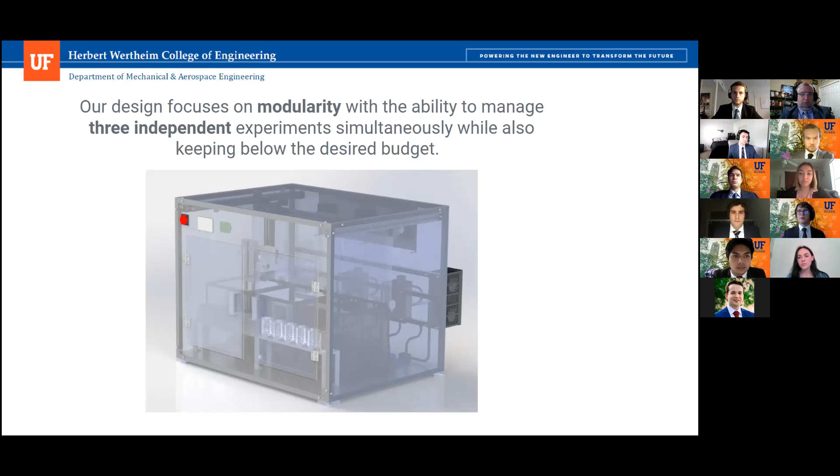Here is an open view of our overall bioreactor. The outside is removed, so you cannot see the doors or the shell. Some important things to note here are on the left side, we have our well plate manipulation apparatus. This holds our liquid and fluid dispensing as well as our FI and OD sensors. On the bottom right, you can see it pointing to our testing chambers. There are 3 of them here that you can see.

Other important details are the elements of our heating and cooling, which we have our heat vent and our heating and cooling water reservoirs in the back, as well as our fume hood adapter to allow our device to work with a BSL-2 biosafety cabinet.

If a user was beginning to start up this device to begin using it, all they would have to do is choose which reactor they were going to use, place their well plate or test tube holder inside, lock it down with the thumb screw, and then also put in their desired filter into our FI sensor and fill up the liquids in the front with the desired cleaning solutions and whatever liquids they desire in the reactor. And then the reactor can begin processing once you activate it on our touch screen on the front.

Here is a close-up of our testing chamber by itself. It has 3 main important elements inside of it. One is our mixing element that covers the 3 orbital patterns: linear, orbital, and double orbital. We have our gas dispensing solenoid at the bottom and our heating and cooling radiators. The only one that can be visible at this time is the cooling radiator on the right side.

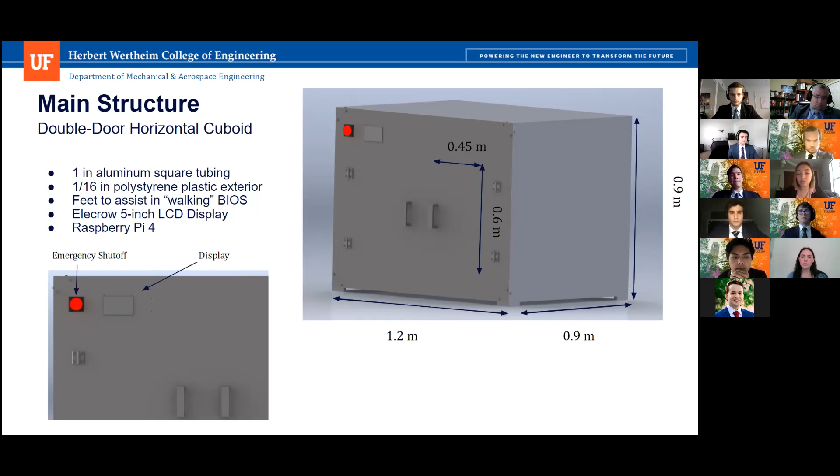Right, so the second element is the mixing element. It consists of a slider crank, orbital shaker, and holder. The slider crank attributes to linear motion, and the orbital shaker attributes to rotational motion. There is a NEMA 17 motor for both the slider crank and orbital shaker, each reaching 500 RPM at a high load on the mechanism.

At the very bottom of the mechanism is the slider crank. The slider crank moves a guide rail carriage on which the orbital shaker is attached. The orbital shaker has 4 offset orbital shafts for stability of the holder that rotates above it. The holder has a slit where the well plate and conical tube slide into, and a thumb screw that is used to clamp them into the holder. Below the holder is an LED array for the OD sensor that will be discussed later.

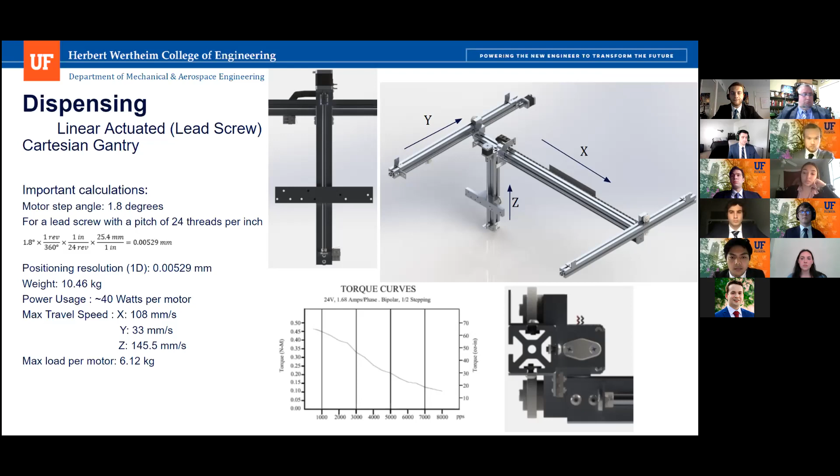The bending moment induced on the beam by the weight of the Z-axis guide rail is maximum when it is placed at the center of the beam. The bending moment was then used to find the bending stress at this location, which then provided the strain in the beam using Young's modulus of the beam's material.

Next subassembly is the gas dispensing system. For this, we're going to be using a series of solenoids. They're 1/4 inch in diameter.

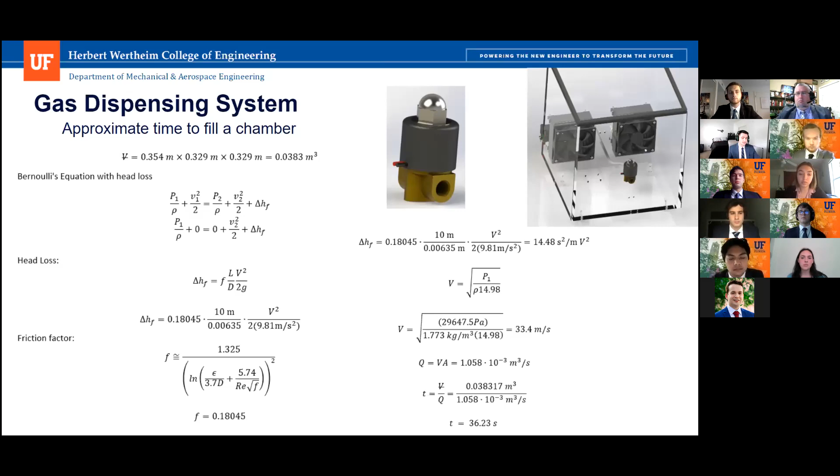Here is a quick calculation for the flow through into the testing chamber. We assumed a minimum pressure inside the tubes coming from the lab of 4.3 PSI, following through with some head loss, and it came to a fill time of about 36 seconds.

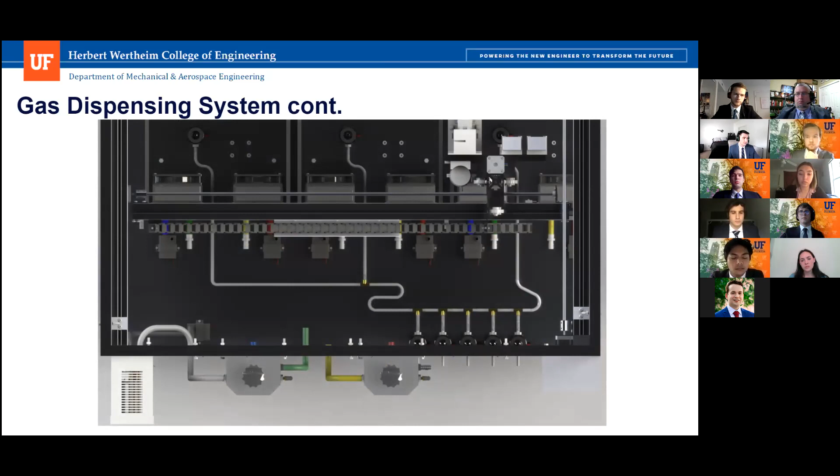Located down at the bottom corner of this image, you can see the inlets that the user will plug the tubing into. Behind this, inside the testing chamber, is the solenoids, which will flow into the testing chamber. This is a top-down view coming from the outside connectors in the bottom corner. It'll flow into each individual chamber to the inlet solenoids on the inside of the individual chambers.

When an experiment is done, the testing chamber roof will open and the fans inside will start to spin, as well as the fans on the main structure. And it'll vent from this hood at the very top of the structure into a bio cabinet.

Our next subsystem is our heating and cooling system, which is responsible for temperature regulation. We have implemented a liquid-based heating and cooling system, which allows us to reach the desired temperature ranges outlined by the customer within the required time.

2 liquid reservoirs are located on the back of BIOS, one for hot fluid and one for cold. For the cold fluid, we are using a combination of 70% water and 30% glycerin. This is to reduce the freezing temperature to around -9 degrees Celsius. Water is used for the hot fluid.

A series of pipes and pumps are used to distribute the fluid to the testing chambers, where radiators are used to circulate air and distribute heat. A 600-watt submersible heating coil has been placed in the hot water reservoir, which is used for heating the water to the desired temperature of 70 degrees.

For cooling, we have designed a unique apparatus consisting of Peltier plates, water cooling blocks, and a CPU cooler to vent off additional heat from the thermoelectric.

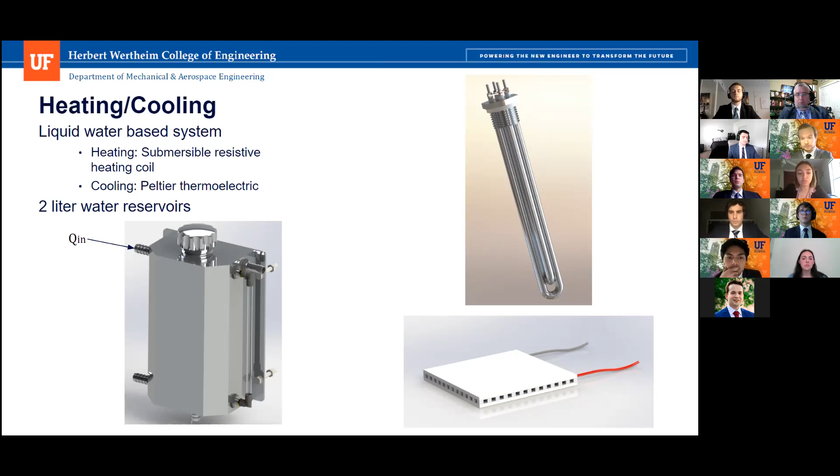Before any experiment can be run using BIOS, customers must prime the temperature regulation system. To prime the system, the reservoirs must be filled with liquid as the pumps are ran at a low power. This will flush liquid throughout the pipes while also filling the reservoirs. Once the system is full of fluid, users will enable the heating and cooling units.

Pictured here, we have calculated the total time needed for the fluids to reach the necessary operating temperatures. For the hot reservoir, this is 70 degrees, and for the cold, this is 4 degrees. At this point, the 2-liter reservoir will be fully filled and the fluid will begin at room temperature.

The heating coil will be operated at the full power of 600 watts for priming, and the maximum power of our cooling unit is about 70 watts. Considering all of these factors, it will take about 16 minutes to heat the hot reservoir and 48 minutes to cool the cold reservoir.

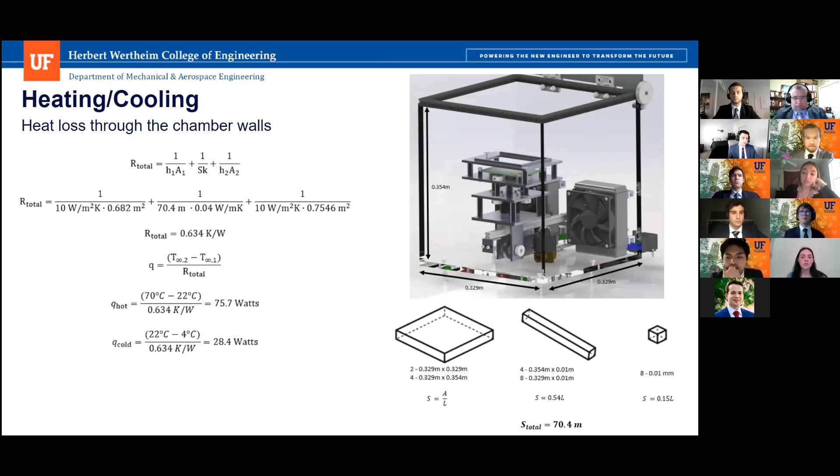In order to determine the power loss through the walls of the testing chamber, we did a 3-dimensional analysis. For this, we had to calculate the shape factors of the walls as well as the edges and the corners. Doing this came out to a heat loss at the maximum temperature of 75.7 watts and at a heat transfer into the chamber in the cold situation of 28.4 watts.

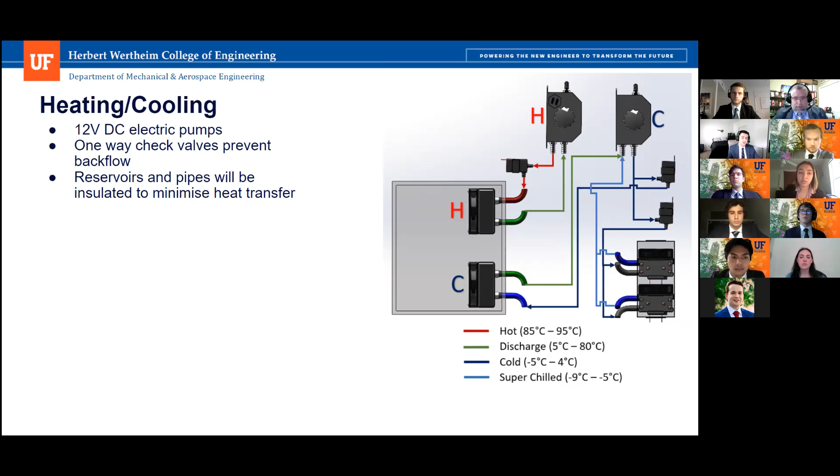However, we don't chill the water inside the reservoir. This will have to be pushed out to a different cooling section of our energy system, through the coolers. We'll cover this briefly later.

In order to handle the high temperature water, we've had to consider using a hot temperature pump as opposed to the ones used for the cold water. The desired temperature of the fluid inside is 90 degrees.

For the cooling, we'll be using thermoelectrics. Pictured on the far right is the cooling stack - this is the entire system of how we cool the water. Starting from the bottom is insulation. Up from that is an aluminum block, which allows water to flow through it to transfer heat. Up from that is the thermoelectric, which pushes the heat into the heat sink at the top, a CPU cooler, which then exchanges the heat with the atmosphere.

Each cooling stack has a cooling power of about 35 watts, and we're trying to get the temperature down to around -4 degrees. To do this and prevent water from freezing, we'll use a 70-30% glycerin-water mixture, which brings the freezing temperature down to -4 or -9.4. The total power of the system that we need to vent through the CPU cooler is 115.5 watts, and the cooler is rated for 120 watts.

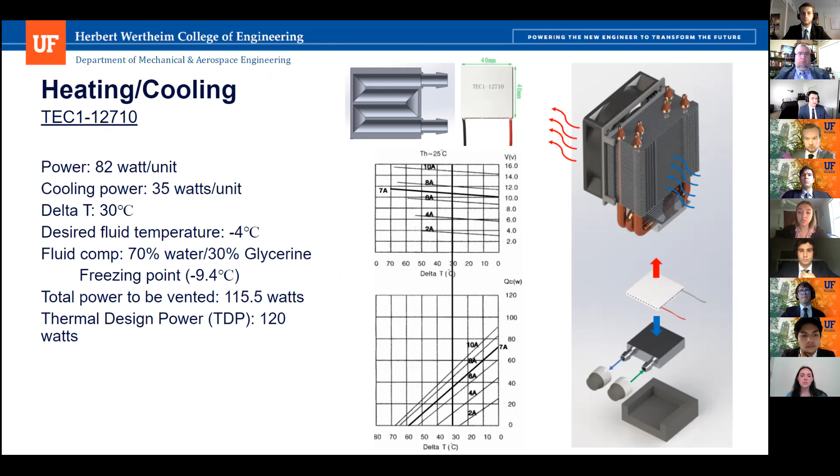An important consideration is the external temperature of BIOS. While the testing chamber will be inside the main structure, the reservoirs will be external. As such, we made sure the temperature of these reservoirs will be safe to touch by heavily insulating them.

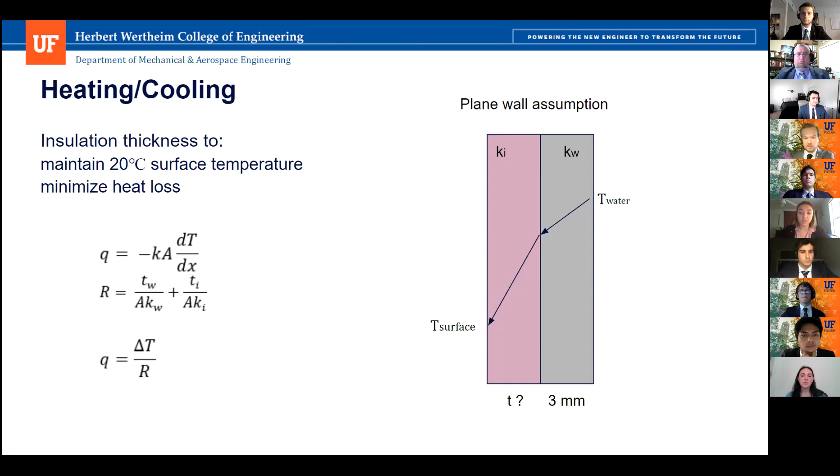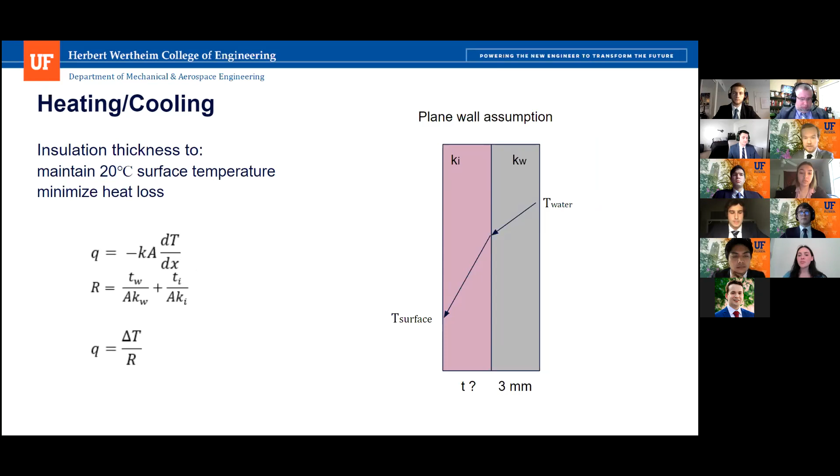A thermal resistance network was set up on the reservoir to determine the necessary insulation thickness while minimizing heat lost through the walls, pictured on the right of this slide. The temperature outside the wall was set to 20 degrees, which will be safe to touch. The temperature at the internal wall was assumed to be the temperature of the liquid inside.

The reservoirs are made of aluminum, which has a thermal conductivity of 205 watts per meter Kelvin. We selected polystyrene as the insulation material, which has a thermal conductivity of 0.04 watts per meter Kelvin. The area used was the largest area on the reservoir, which will have the lowest resistance and therefore the greatest heat lost. All of these values are pictured on the left of this slide.

We performed an iterative process to determine the necessary insulation thickness. After performing multiple trials, the insulation thickness was decided to be 15 millimeters.

Calculations are shown on the right for the heat rate for both reservoirs. Using this 15 millimeter insulation thickness, the heat lost from the hot reservoir is about 1.19 watts, and the rate of heat transfer to the cold reservoir is about 0.4 watts. The heat loss from the hot reservoir is over the desired 1 watt; however, this was deemed acceptable to ensure a nominal dimension for the insulation.

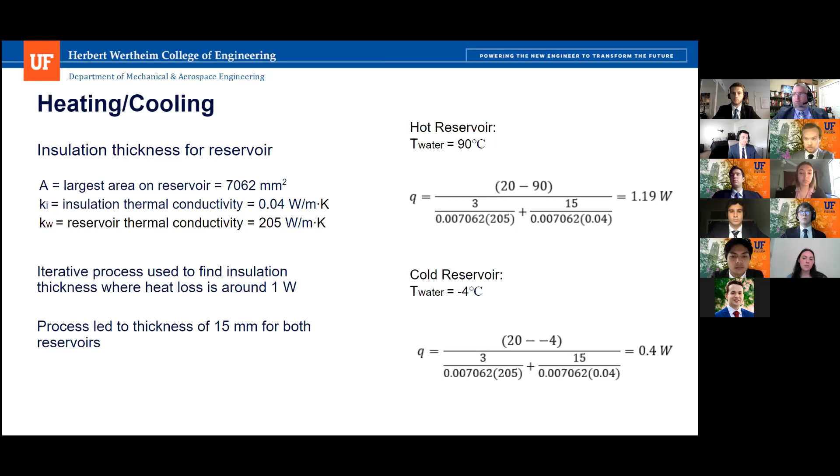For the fluid management system, we are using a linear actuated pipette made by Opentrons - this is the P300 model. Some important calculations for the system include a Reynolds number of 604.7, a flow rate of 300 microliters per second, and accuracy and precision of 0.6% and 0.3% as taken from the website. The achievable volume is 5 microliters to 20,000 microliters, and this takes into account the pipette returning to the reservoir.

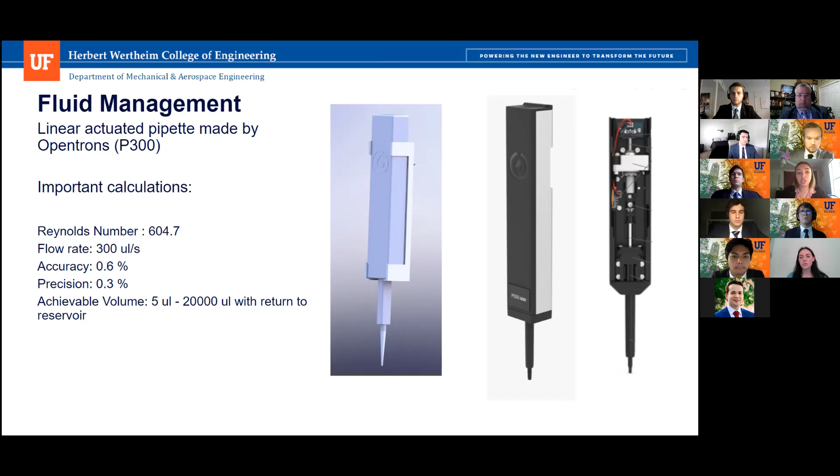For the waste management, we're also using a linear actuated pipette made by Opentrons, however this model is the P1000. A larger pipette was chosen since accuracy and precision aren't as crucial as for the fluid management system. Important calculations include a Reynolds number of 604.7, a removal rate of 1,000 microliters per second, and accuracy and precision taken from the website of 0.7% and 0.15%.

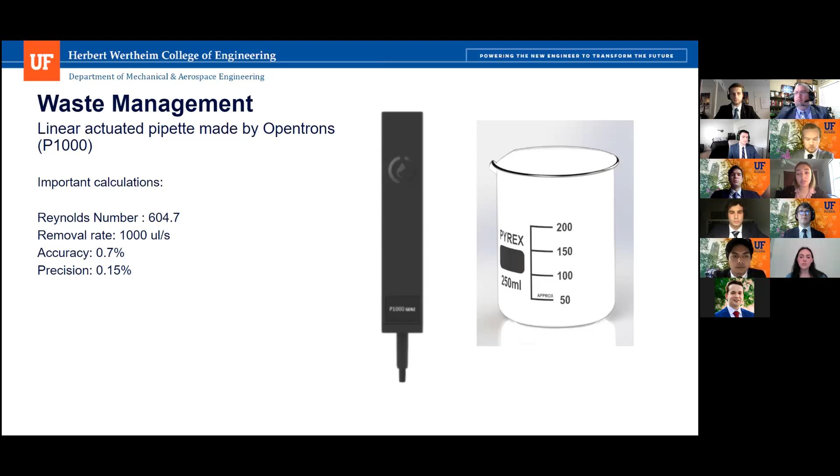The fluid and waste management systems both have auto tip ejection functions, allowing tips to be removed and placed in the waste bin quickly. Also, both the fluid and waste management are attached to the gantry shown in the dispenser element, and a mount made out of ABS is used to attach both of them to the gantry.

BIOS is equipped with a sensor element subsystem responsible for taking spectrometry readings. Our customers require that BIOS be able to take measurements for both fluorescence intensity and optical density. For this, we have implemented 2 assemblies within this subsystem, one for each measurement type.

First, we'll present our fluorescence intensity apparatus. Our fluorescence intensity apparatus consists of 3 main components, all enclosed in ABS 3D printed structures which will then mount to the gantry. The first and most important component is the photomultiplier module, otherwise known as the PMT module, created by Hamamatsu.

PMT modules are highly sensitive pieces of equipment that will convert light into electrical signals. A circuit is built into the PMT module that will output any readings as a current, which can then be wired back to our main controller.

Our PMT module has a spectral range of 300 to 740 nanometers, which can therefore measure all light within the visible range. Additionally, our PMT module has a settling time of 0.2 seconds, which means the FI sensor assembly can take an accurate reading of a well within 0.2 seconds and ensures BIOS can measure fluorescence intensity within the customer desired time of 6.5 minutes.

In fact, the FI sensors of BIOS can process a 384 well plate in 1.58 minutes, as stated earlier.

The next component for the FI assembly is a microscope filter cube from Thorlabs. Emission filters can be inserted into the filter cube, which will filter light to a specific wavelength as desired by the customer. Over 100 fluorophores are compatible with the Thorlabs filter cube set.

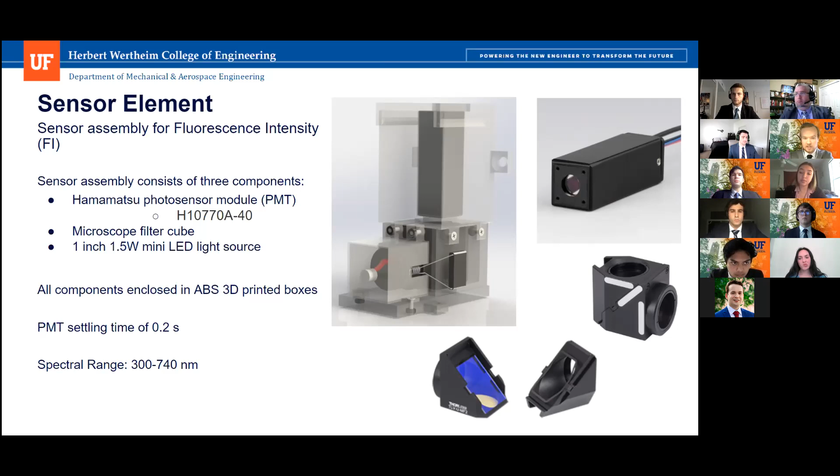The power of the light source output is set by the maximum measurable power of the sensor. Our specific PMT module has a cathode radiant sensitivity of 189 milliamps per watt. This is essentially how much current the PMT can convert per unit watt. Additionally, our PMT can only output 2 microamps of current at maximum.

Considering both of these equipment properties, we deduced that the PMT module can only measure about 0.01 milliwatts, as pictured to the right. Therefore, our light source will be more than powerful, and in fact will need to be throttled down. This is not surprising as PMT modules are a very sensitive piece of equipment, specialized for high sensitivity measurements, meaning they are designed to work with low level light detection scenarios.

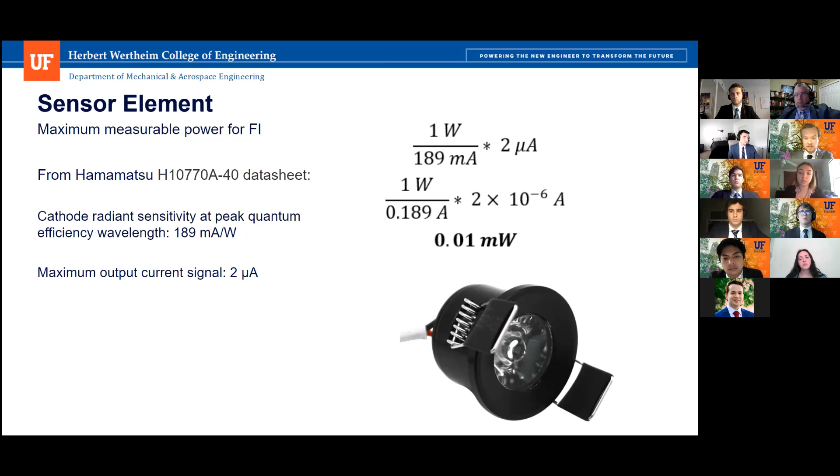As for the optical density sensor, the sensor assembly consists of the following parts. First, a 918D-SL-OD3R photodiode made out of silicon inside an ABS 3D printed structure. The photodetector is compatible with DB15-based Newport that will then be connected to a Raspberry Pi.

The light source consists of an LED source located below the well plate in the mixing element, whereas the OD sensor will be attached to the dispenser. So the light passes to the well plate and is received by the optical density sensor.

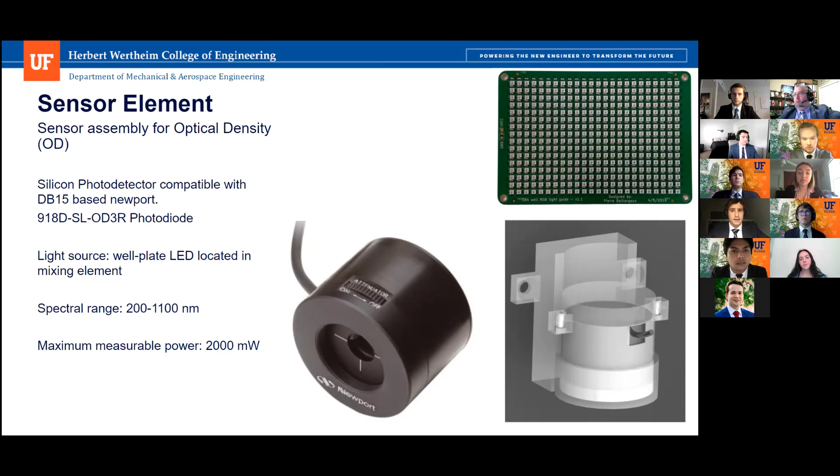The optical density sensor can read 600 nanometers and has a spectral range of 200 to 1100 nanometers, which also measures the desired wavelength. The light source can output 600 nanometers as well. And finally, the maximum measurable power is 2000 milliwatts.

And now, for the power consumption, I would like to mention that the following data is analyzed when the experiment with the 3 testing chambers is taking place at the same time with the 3 motors. So that is the worst case scenario.

So the power usage by the total system, again in the worst case scenario, would be 600 watts for heating and cooling, 120 watts for dispenser moving in 3 axes, and 240 watts for the 3 mixing elements. Adding up the power by every subsystem, we get a total usage of 960 watts, again in the worst case scenario, which is below the 1000 watts maximum output of the power supply.

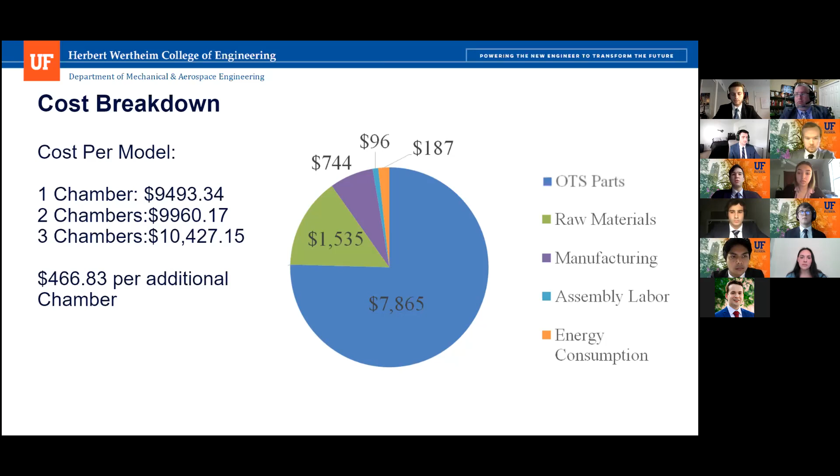Now we're going to explain a little bit of why you should choose BIOS over the competition. Well, our main benefit is our unifying goal, which is our modularity. We can maintain 3 different gas compositions, temperatures, and dispensing fluids, which means we can run 3 individual experiments.

Each subsystem was designed to be separable from each other in the main assembly for easier transportation. It's also very efficient at heating and cooling, and all processes are entirely automated. All that is required is setup before the experiment and a little cleaning after experiments.

We also have many precautions against cross-contamination, and we know that we are below the budget for our 2-chamber models. Additionally, our 1-chamber model is even $500 below budget. And our fume hood adapter allows the bioreactor to sit next to a fume hood in a lab, and waste gases will exit BIOS through the fume hood adapter.

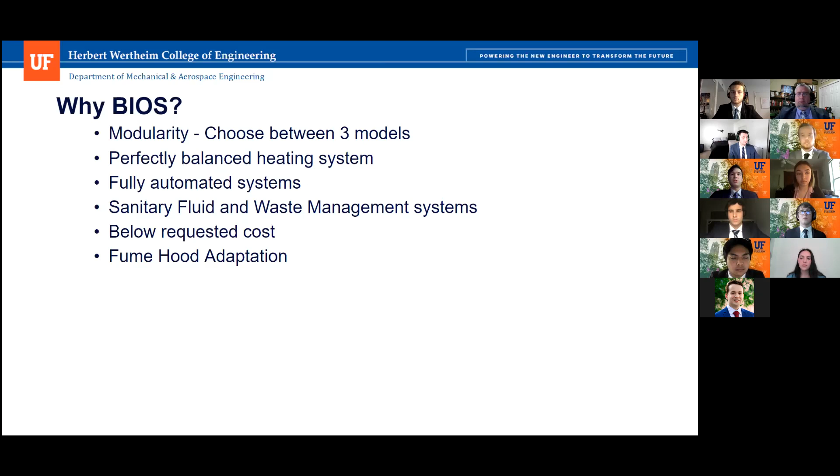This concludes our presentation. Thank you for your time. Do you have any questions?

Okay. Well done, you guys are fast. You've got 20 minutes to go on the countdown timer, so we'll have a little bit of time to let you interact with the panel. So, any immediate questions from our colleagues on the panel?

Hey guys, this is Tom Singer from Northrop Grumman. I mentioned to Rick Miles off on the side, this is the second presentation in a row where we had structures analysis with shear moment diagrams. Good work, I would much rather see that than see a FEM. I hope I haven't traumatized anybody with my FEM feedback, but this was much better. It's the right tool to use for the problem you're trying to solve.

That said, could you flip back? I think the second set of shear moment diagrams that you had with the double cantilever beam. Yep, that was it. This is a double cantilever beam, right? It's one singular cantilever beam fixed at both ends. So double cantilever beam, it's like fixed in all degrees of freedom at 2 ends of the beam, right? All right, correct, double cantilever beam.

All right, that fixed constraint, does that apply a rotational constraint as well? Yeah, so at both ends of this specific cross beam, it's bolted into the sliders that are on the 2 guide rails on either side. So preventing it from rotating at either end? Correct. Okay, so what's wrong with your shear moment diagram?

There should be moments at either end. Yeah, it should be non-zero there. Correct. This is a statically indeterminate structure, and I was mentioning to Rick, they're a pain in the ass.

So right, so you've got to- I don't know if Dr. Traum typed that in response to me just now. Yeah, so you've got to figure out what your moment is at each end, and there are various ways you can do that. A real simple way is to just make it not statically indeterminate, so that you know exactly where your moment is. But yeah, that's something to be corrected here. Otherwise, I definitely appreciate the tools that you brought to bear on this problem.

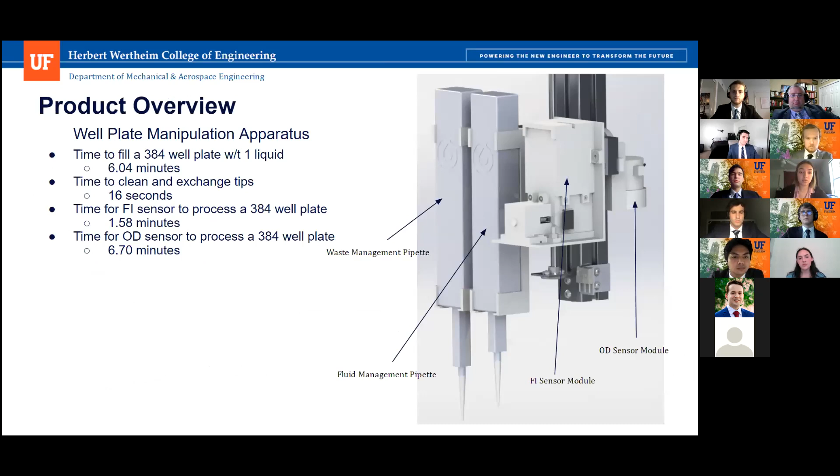At the very beginning of the presentation, you went over the actions a user would be taking to start the system, in terms of what consumables they're providing and loading into the machine, which is good. But what would really help is the next step: what is the machine going to do after the user says go? What process is it going to do, what's that going to look like? That's going to help reviewers and customers understand what your capabilities are and what capabilities might not be there.

So that's something that would be very helpful to show, whether that's as an animation or just you walking through the various steps, like oh, we're going to put fluid over here, and then take some fluid out of here, dump it over here, dispense a pipette tip, shake things, put caps on, all that sort of stuff. As a walkthrough up front, or even probably better at the front than at the back, but at some point just to communicate that information would be very helpful.

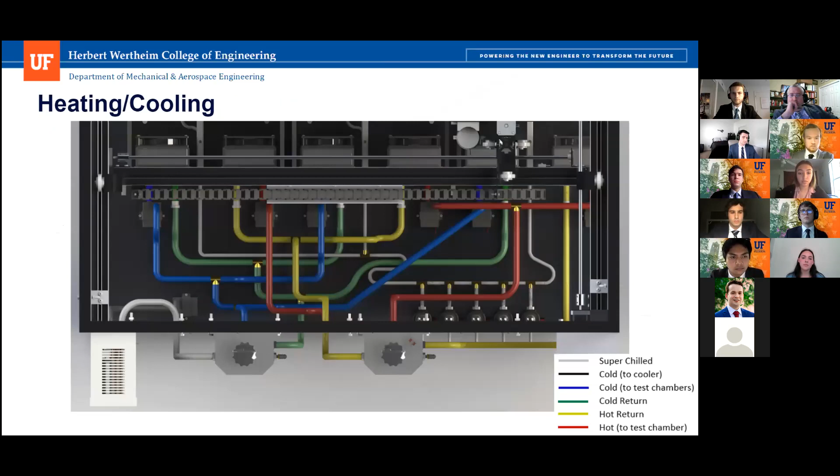Your hot water tank - so you're heating up water to deliver heat to your samples. And you said that's sitting at 90 degrees Celsius on a tank on the back of the machine, and it's insulated, with insulation enough to keep it at 20 degrees Celsius on the outside. Is that correct? Yes, that's correct. How is your insulation keeping the outside of a hot tank colder than room temperature?

20 degrees Celsius. We believe that is room temperature. It's keeping it at room temperature, yes. So with 1.5 centimeters of polystyrene, you're keeping no sensible heat or temperature through the system with 90-degree water on the inside. That is what our calculations led to. Interesting - I guess 20 is room temperature. That's very effective insulation.

Let's see, your power budget - I appreciate you putting that up, because I don't think any other teams have covered that. I definitely appreciate you putting that up.

It seems like it's missing - I certainly recognize not everything is going to be operating at the same time, but you're not covering the power for your optical sensing system, or any power needs for a user interface. Nobody's really talking about user interfaces because that's mostly software and hasn't been done at this point, but it is going to have some mechanical aspects in terms of power draw. Startup of pumps could be an issue, which obviously can be solved with a few capacitors, but those sorts of things - so I don't know that it's necessarily true that your worst case is 960 watts. That said, that would be a worst case calculation, and it's probably going to be easily under 1,000 watts when you look at realistic analysis.

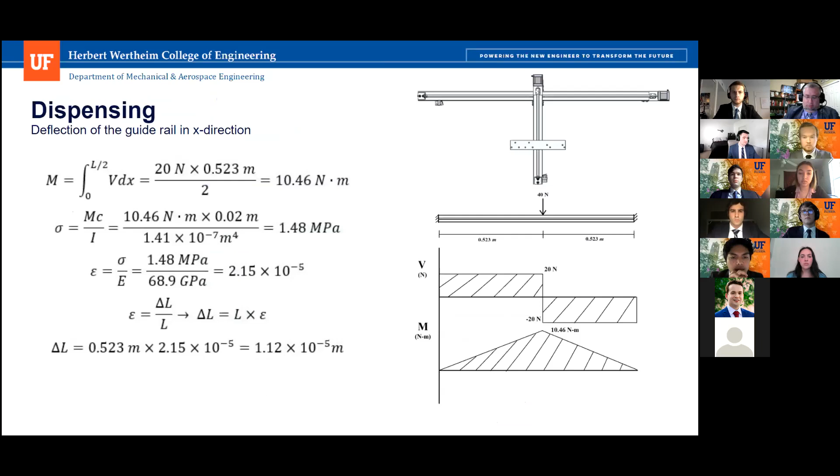And there's one other thing - oh yeah, you're on. I apologize, I'm jumping back and forth in your presentation. Your closed boxes - you've got a lid on the box that's held down, you said, with magnets. It's not held down by magnets, it's held down by its own weight. Well, the magnet is just - with magnets, I guess. Yeah, yes.

What kind of torque is it going to take to open that at the hinge? The torque required is... the torque is 0.331 Newton meters, and we have 1.26 Newton meters power from the motor, including the gear. Okay, all right - I mean, obviously if you're trying to open a door you want to do it not at the hinge, but if you're able to do that with your motors, then that's great. And I guess the last question I'd have is...

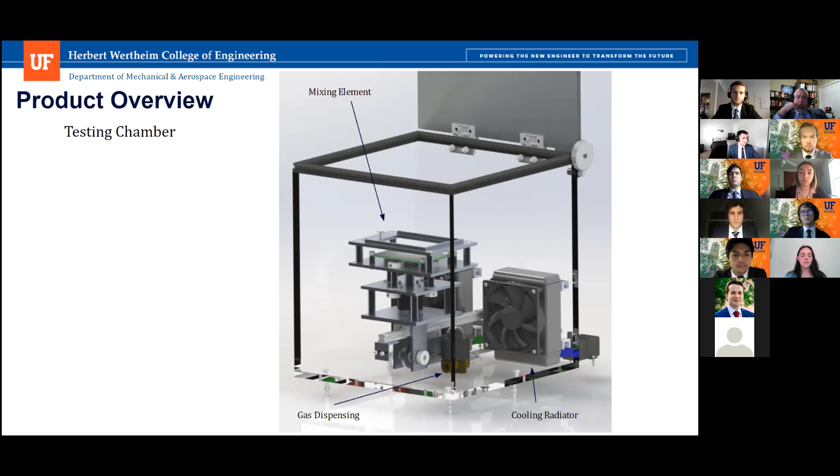I don't know if you covered the frequency that you're shaking your shake table at. Yeah, so it's going at 500 RPM, which is something like 8 or 9 hertz or so. Have you looked at any vibration analysis to identify if there's anything going on in your system that an 8 or 9 hertz excitation frequency could excite? So we didn't do any vibrations analysis, because this whole mixing element is surrounded by 10 millimeter thick styrofoam of the chamber, so lots of those vibrations are going to be dampened out, and we didn't see any members that would be excited by any low frequency vibrations. Okay.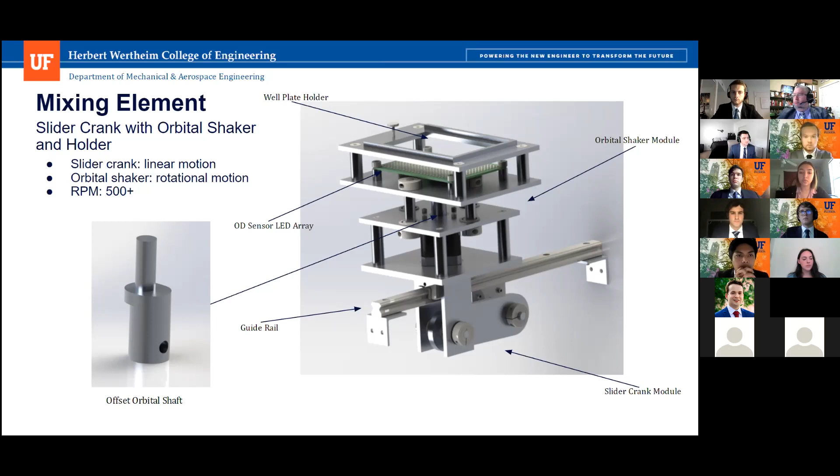So this is Rick Miles, Northrop Grumman. I think one of the things that would have been helpful in this presentation is just tying it to the requirements, walking through what it's supposed to do. I had a tough time picturing the clear advantage of the 3 modules and why I would want to buy a 3 module system over a 1 module system. I'm looking at the beginning of your presentation where you're showing the overall apparatus - yeah, that right there.

So I'm having a tough time picturing what's going on in each one of those modules. Is it just a different well plate, different tubes? And therefore, if I decide to take one of them out, I've still got the same outside enclosure, right? So if I buy the 1 module system, I've got a lot of wasted space, or am I not understanding it correctly? Yes, you're understanding it correctly - you would just remove each of those testing chamber modules if you wanted the lower cost model. Okay.

Additionally, the primary benefit to the multiple chambers is each chamber will have its own heating, its own gas concentration, and its own mixing with its own well plate, its own fluid. It is designed so that you can run 3 separate experiments. That is the main reason it exists.

Okay, and I guess that's what I was kind of getting at with the requirements. I'm still trying to understand what is required by the customer versus what is a nice to have. Did the customer require the ability to do multiple experiments, or are they focused on doing 1 experiment at a time? I've been watching all these presentations, and y'all are the last one. I still don't quite gather exactly what the overall need is in terms of how many experiments they would like to perform at one time.

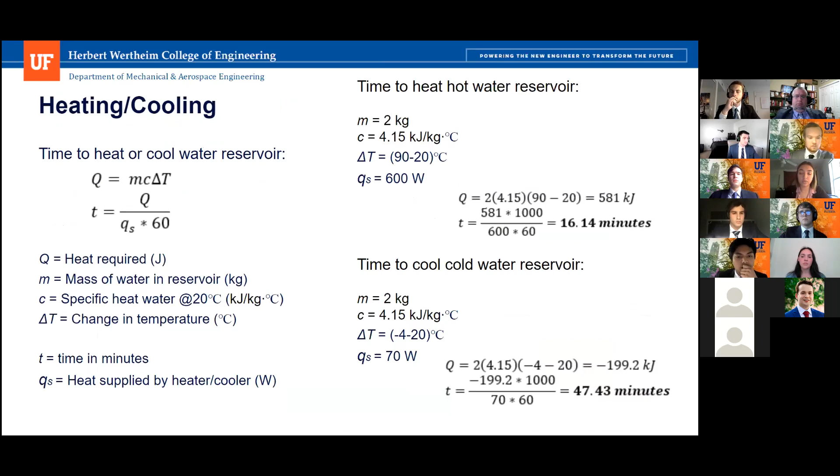A good average, essentially, is you sacrifice cooling power for differential in temperature. In order for us to attain the correct temperature differential we're looking for, we had to sacrifice cooling power, which is something I believe a lot of the groups decided to leave out for the sake of convenience. So it's a little bit harder for us. However, we have the correct data, and again, these are only as good as the manufacturers say they are. So we have an additional purchase order with 5 more of these. There is some data on being able to stack these to increase the cooling power or the temperature differential, so a lot of this will come down to the prototyping and testing phase.

Okay, thank you. Thank you.

Okay, questions before another Northrop Grumman person came on. Oh sorry, somebody asking, I heard a slight... Joel, can you speak up a little bit? Yeah, how's that? Is that better? There we go, yep, okay. I was going to let someone from Cummins jump in here since we had 2 people from Northrop Grumman, and I'll be a third if I ask them questions, but I don't see them on right now, so let me go ahead and ask the question.

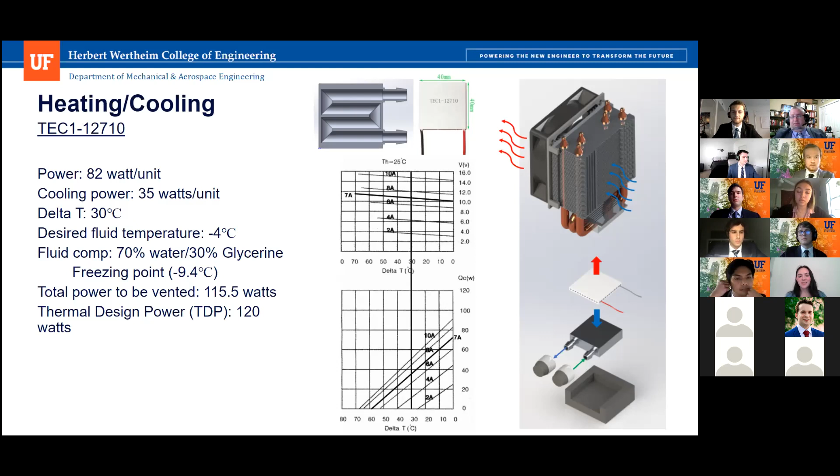So I had the question about the cooling also, it seemed like a long time for that. When you guys sized the dirty bleach beaker — try to say that 3 times fast — did you put any consideration into how you sized that? The same size, I think, as every other beaker, right? It was just, we wanted uniformity of height, and also we wanted it to fit within a small space, so it was kind of trying to fit the best of both worlds. Given that that beaker's diameter is about the size of the syringe buckets we will be receiving from the Opentrons, or that our clients would have to buy, and also the height is very similar, it would make the programming of the location easier for that phase of making the product.

Okay, so that's a possible trade-off you might want to look at, because it might end up being the limiting factor to how many experiments you can run.

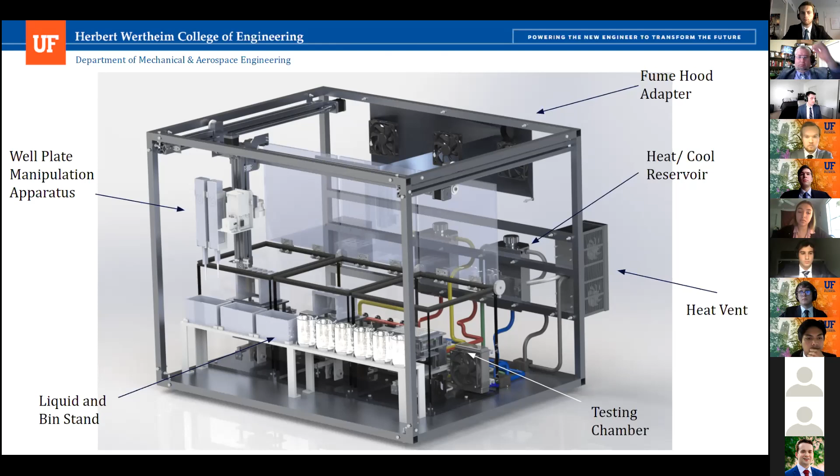Let's see what else here. I was looking at the mixing element, and maybe it's just because of the diagram — does it only have support on one side, or is it supported on both sides? It has support on both sides.

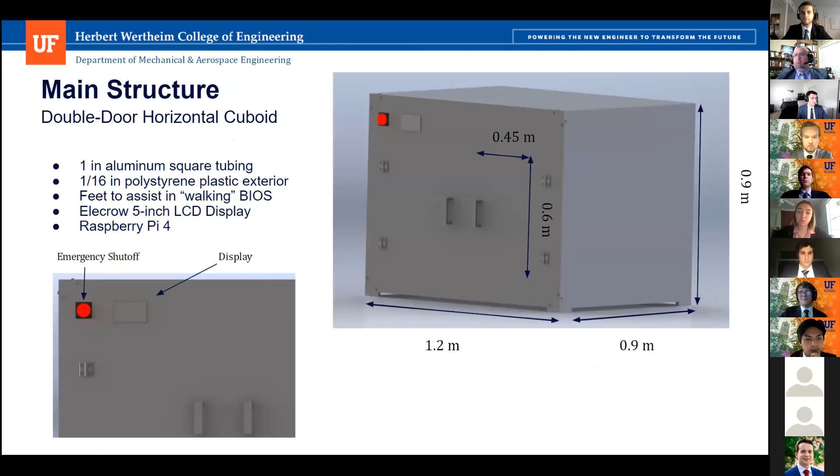Sorry, Mikhail. Yeah, you can go ahead. Yeah, all good. There's a support on both sides of the guide rail.

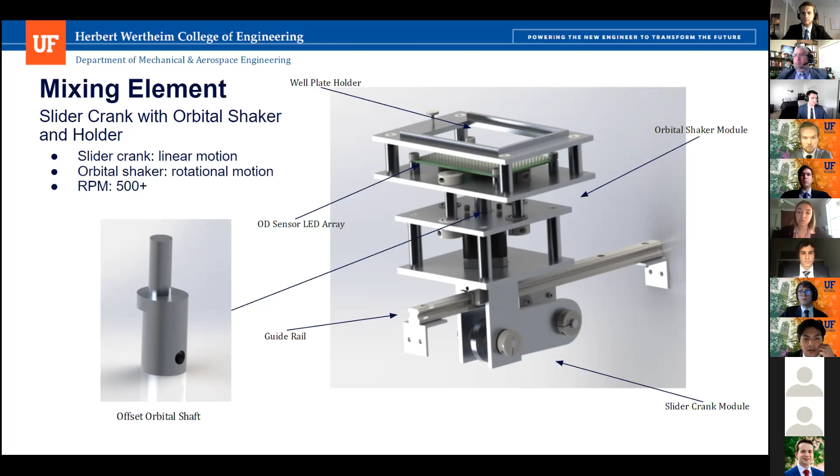Okay, but then it looks like it's uneven. It looks like it's more toward the left and back, kind of like it's on a monorail. Yeah, it's a little bit offset. That's dependent on the heating and cooling system, because the fans... the motor has to be a little bit further from the fan, so that's why it's a little bit offset.

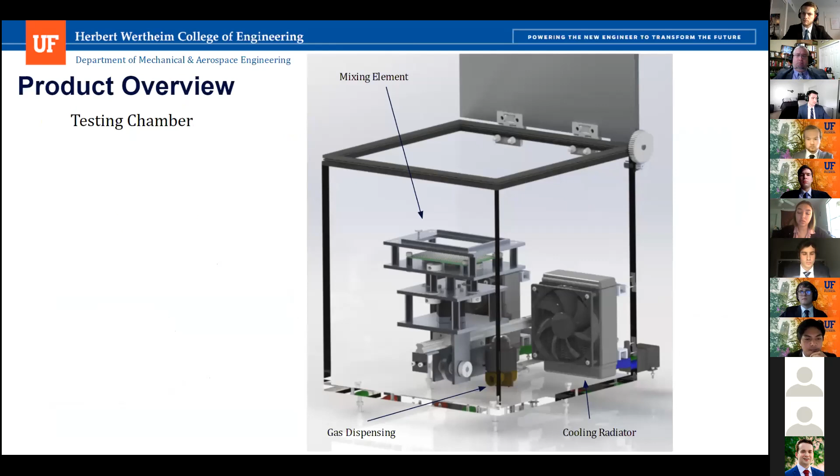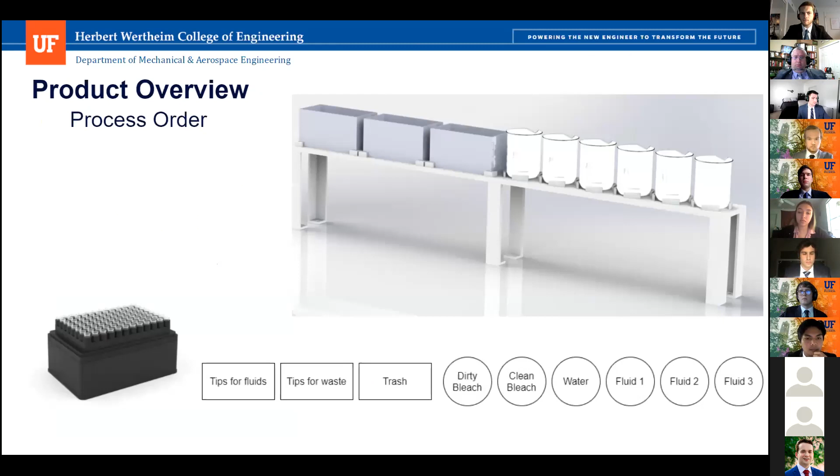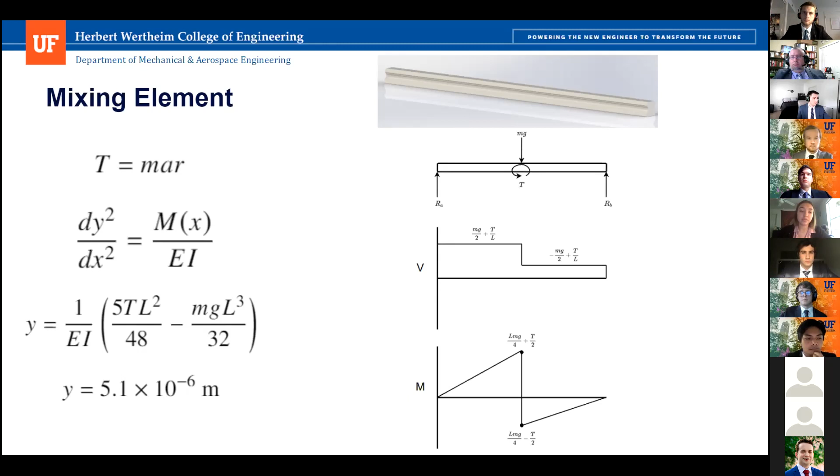Okay. Yeah, all right. Thanks. Thank you, kind of following up on that.

If you go back, this thing is basically sitting on a monorail, more or less. What are the lateral accelerations? Because in an orbital pattern, this thing's going to be going side to side. I'm waving my finger like you guys can see me because I don't have a camera on me. What's that going to do laterally and twisting-wise to that beam?

So we did the calculations with the acceleration at its maximum, and there wasn't much deflection from the side to side. It was mostly with the back and forth along the rail. I wouldn't expect side to side to necessarily be a huge deal, but I would expect torsion to be a concern, and if not from deflection, then potentially from wear, because it's really only contacting at a limited location there. You can imagine the whole thing is going to want to wobble, right? So it seems like that's maybe not the most structurally sound way to do that.

Yeah, well, that's why we did the deflection - at least vertically up and down, it was I think 5.1 micrometers, and up and down isn't such a big deal, right? Because you're not accelerating up and down, you're shaking side to side. Right, so that's kind of the bigger deal there. Okay, I got you.

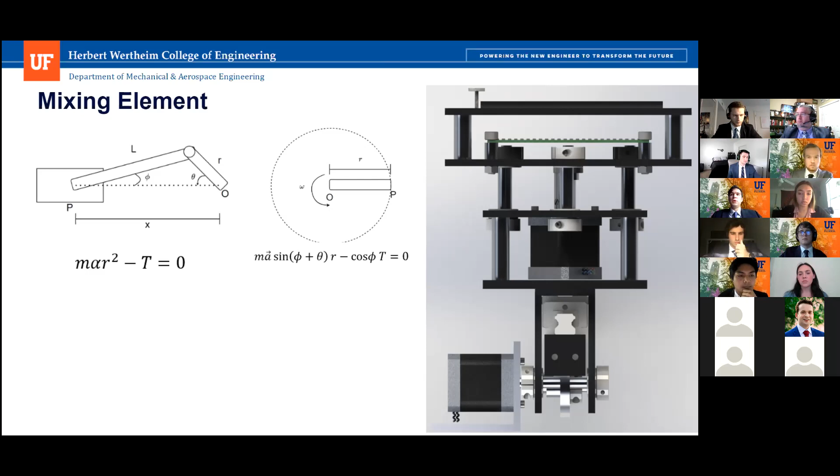And if I could go back, when Rick was asking about the requirements that we're driving 3 separate chambers, I forget which one you mentioned that the requirements from the customer were kind of vague, and you sort of intuited a requirement from them. Customers often write vague requirements, and you can get yourself into a significant amount of trouble if you try to guess what the customer meant when they're not clear. So it's always a good idea to be in contact with them when you think something's not obvious.

We talked with the last group where they're very specific - they want a 1.2 factor of safety. Well, 1.2 factor of safety in a structures world is nothing, right? So probably that's not what the customer meant. If NASA's launching rockets with 1.5 factors of safety, and they have to be super light and go through all sorts of controls to make sure materials are what they think they are, 1.2 is probably way too sporty for something that's going to sit on a bench top in a lab. So the customer probably wrote the wrong requirement there. And it sounds like if you're trying to get inside their head and figure out what they meant, it's way better to just go ask them, hey, what did you mean? So be in contact with your customer, especially in a situation like this where you have such a well-defined customer who's writing requirements for you.

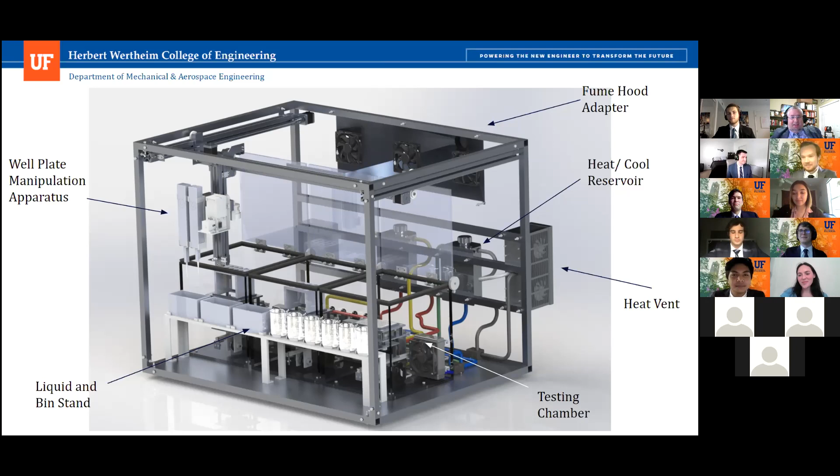That's why they don't let me teach thermo. Anyway, okay, I think we're done. Sorry, we ran over with my little thermo question, so we'll call it there. But thanks for sharing your design with us.